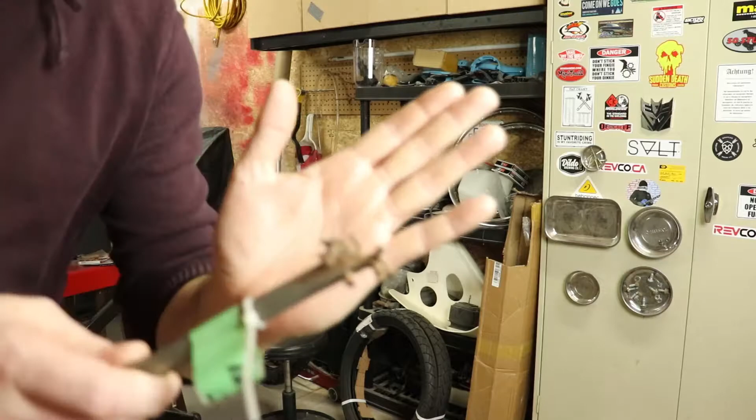Back in April of 2021, I started shooting part 9 of the C70 restoration series. You can see there's a bunch of C70 parts here, tires, rims and stuff like that. What we're doing in that video is the wheels. I got the wheels apart, but the spokes are in really bad shape. Let me bring you in - well, not horrible, but not something I want to put back on the bike. You can see they're rather rusty, so these need to be replated.

I recently ordered a bunch of nickel, actual pure nickel. I'm going to be making a nickel plating solution out of that and doing some electroplating, so you'll see that in that video. But while we wait for that stuff to show up, I have an idea with regard to something I'm going to want, potentially need, when we put these wheels back together. So to the bench, let me show you what I'm talking about.

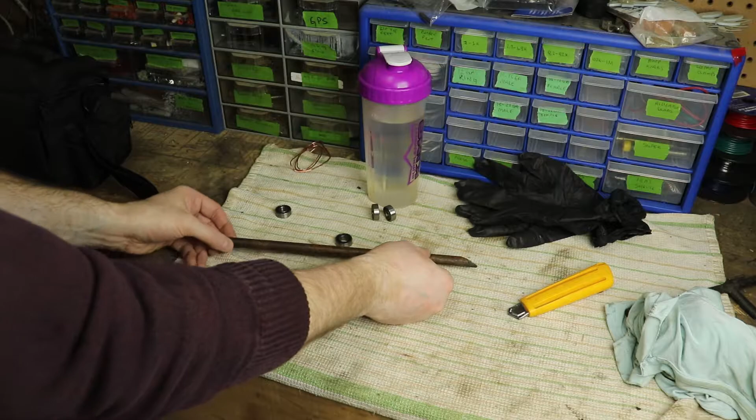I took a quick trip over to my scrap pile of steel and I've got this rod that I want to use. The way these are usually made is you have 2 uprights, and on top of each upright you have bearings mounted on either side. Your rod then sits on top of those bearings so it can spin freely. Then you have cones on either side with set screws that you can tighten down to hold your wheel in place. That all is mounted on a flat base.

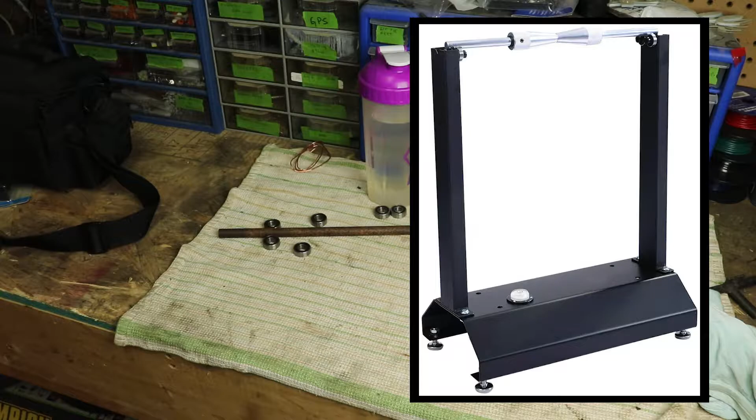I'm not too concerned with the flat base part. I'm not going to make something with adjustable feet or anything, because this is something I'll probably just clamp using vice grips or C-clamps onto the end of my motorcycle lift. That way I have an easy spot to adjust up and down to work on this stuff. So here's a quick look once again up close on something you can buy, and I'm going to try to build it. Here we go.

The first thing I need to do is cut this nasty pointy end off this piece of rod. I'll zing that off quick, and we'll bring this rod over to the lathe and ensure everything's good, true, and cleaned up.

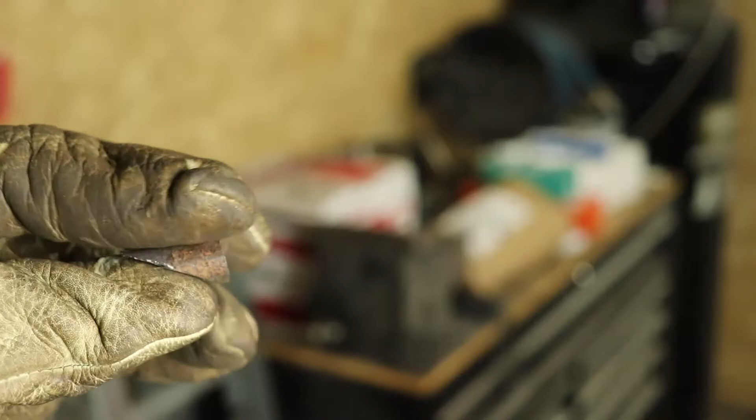Now that we've got the nasty pointy bit off the end, relatively decent cut - no Allen Millyard, but it works out. Let's take this over to the lathe, get it center drilled on both ends, so I can use a live center with it, and get it cleaned up.

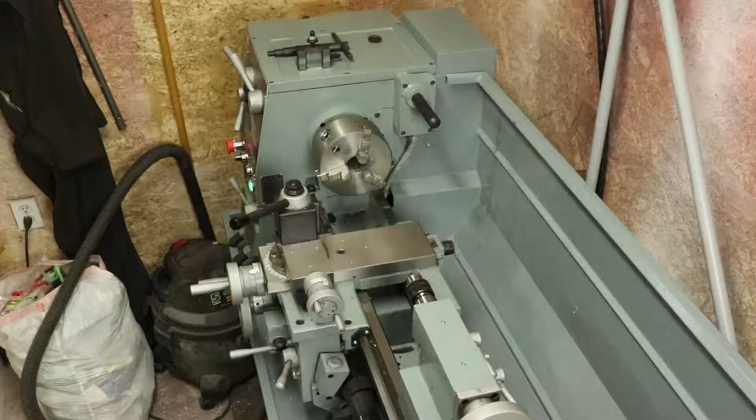So to this point I've got my piece of steel cleaned up - I just cleaned it up on a wire wheel. Hopefully this is looking alright, I'm going to double check this, make sure it's not bad. Yeah, you guys can see what I'm doing. You can't see my face, but who needs to?

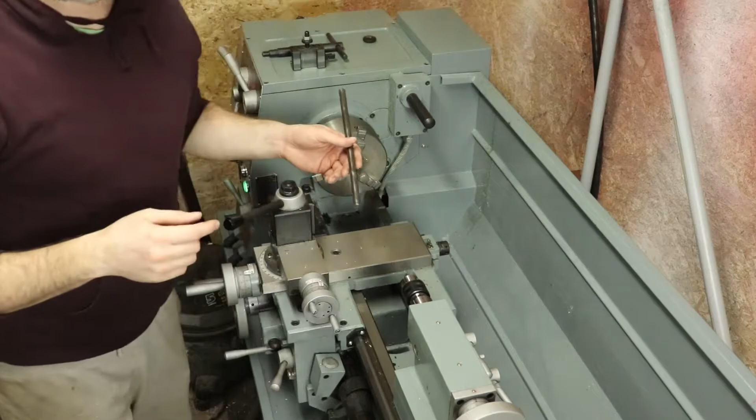What I'm going to do is put my 3-jaw back on and chuck this up. We'll center drill each end. First I'll face it off and center drill, then flip it around, face it off, and center drill again. Then I've got a means of putting that in a live center, keeping this nice and straight with hopefully minimal flex when I take this down to size. I'll leave the camera running - this will be a quick fast forward through so you guys can see what I'm doing.

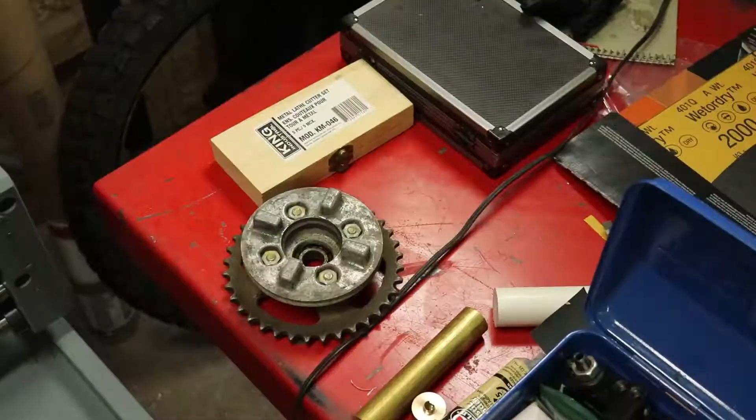So let's talk about the cones we want to make for this truing stand. Looking at the ID of the bearings in the hubs of the C70, I think these are 17 millimeter. Yep, there you go, focus that.

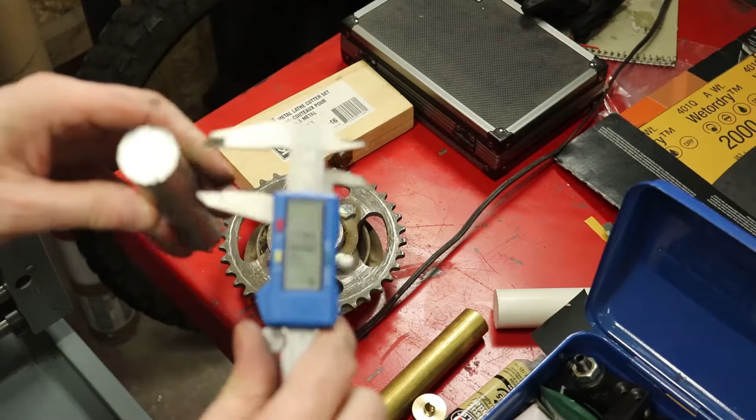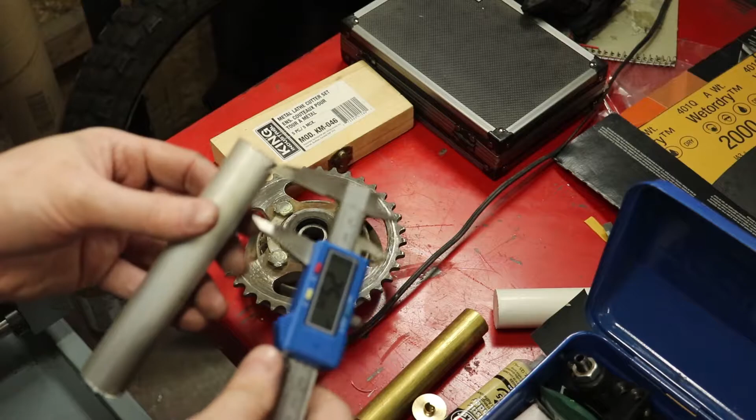The aluminum that I have is 1 inch, or 25 millimeter. Not autofocus, so you can see it, 25 millimeter. So I want to take a millimeter off the OD of this to make it 24. Let me turn autofocus back on here. So what I'll do is take a millimeter off, as you can see, this is 25. I'll take a mil and a bit off that to make it 24.

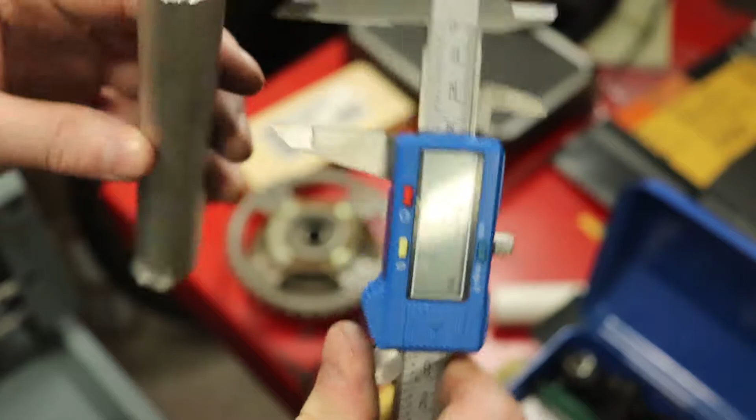I'll make these cones 50 millimeters long, roughly 2 inches. Wherever that 50 point was, I'll try to hold that with my thumb. We'll take this into 40 mil, leaving a centimeter up top for the flat piece, where we'll drill and have our set screw. The taper will be 40 mils long, going from the 24 down to probably something just a little larger than the diameter of the rod, which is 12 millimeter, so probably like 14 millimeter. So we'll take a centimeter off total for the taper on this.

So I'm going to get this chucked up, get an edge straight, bring it down to 24 millimeters, and then we'll go ahead and start cutting the taper and get our first cone made. See how it goes.

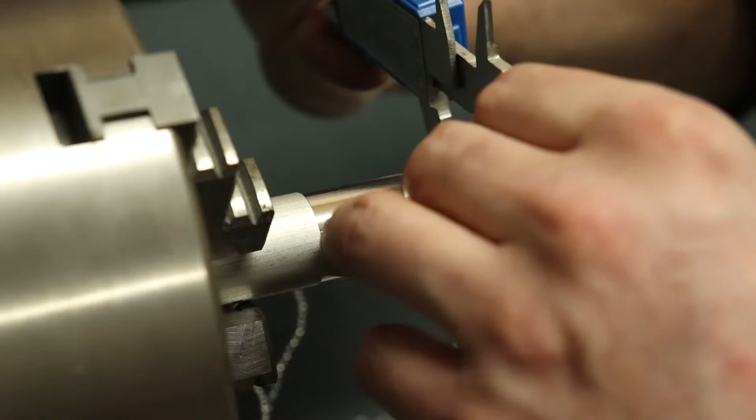At this point we should be pretty much dead on final diameter. Have a quick check here. We got 24.03, 24.04. So yeah, we're there. I'll call that good. So now what I want to do is set up my compound to do our taper.

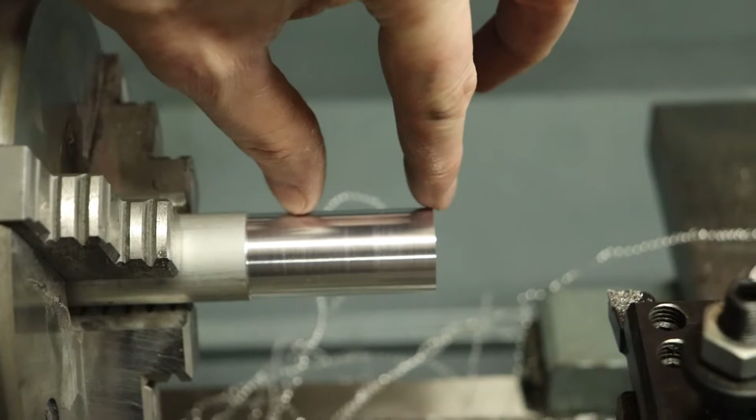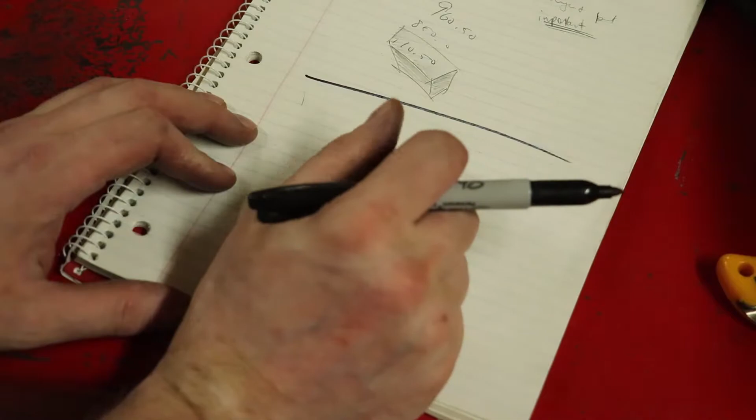If I just lift you, hopefully this is half steady. What we now want is, I'll mark off 40 millimeters, 4 centimeters of width, and we're going to go from a 14 millimeter end of the cone over here up to 24 here, so we'll have essentially a centimeter of ID to work with when we go to true up any wheels going forward on the stand. So we're going from 14 millimeter to 24 millimeter, meaning we have 1 full centimeter to take off, and because we'll be doing this as a triangle, we'll be doing half of it.

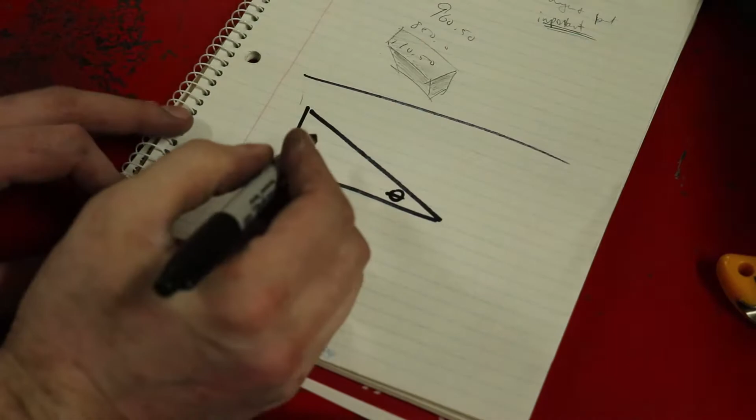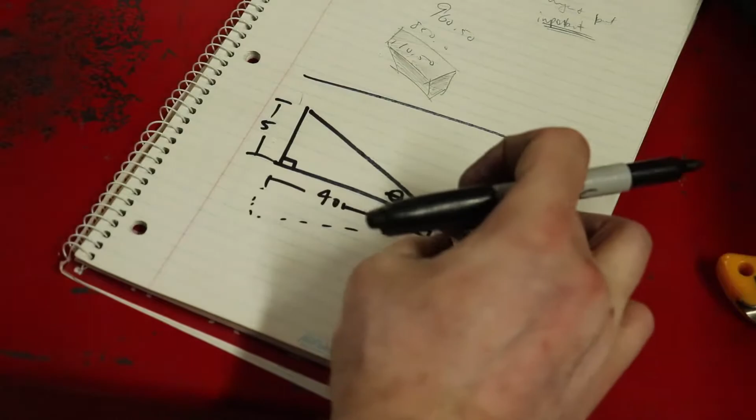So we've got a situation with a right triangle, angle theta. This side is 40 millimeters, and this side is going to be 5, because it's half of the 1 centimeter, or 10 for the whole thing. Just think if it backed up this way, we'd be going from that 14 out to the 24 - we just have a gap here, but we're not too concerned with that gap right now.

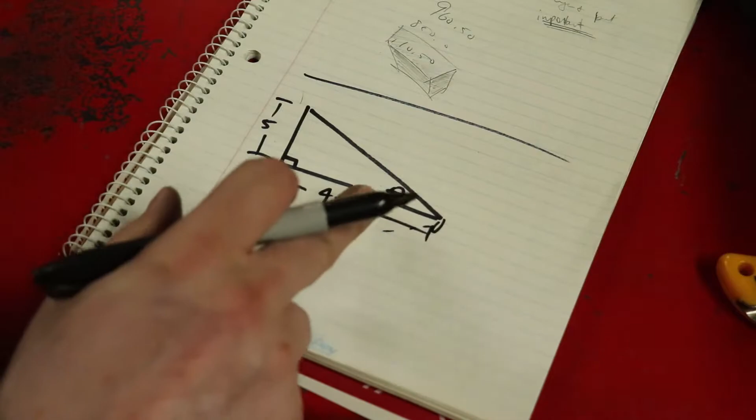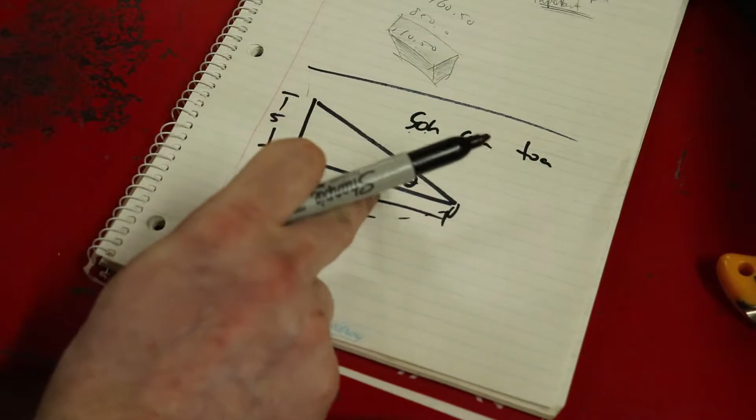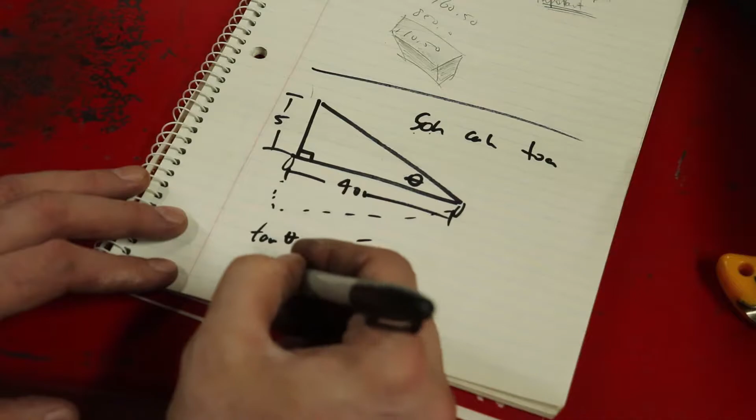So if we look at this, solving this is going to be sine of theta equals opposite over hypotenuse - sorry, opposite over adjacent, SOHCAHTOA. I've got to use tangent here. Sine is opposite over hypotenuse, cosine is adjacent over hypotenuse, and tan is opposite over adjacent. So tan theta equals opposite over adjacent, meaning theta is the inverse tangent of 1 over 8, which works out to be...

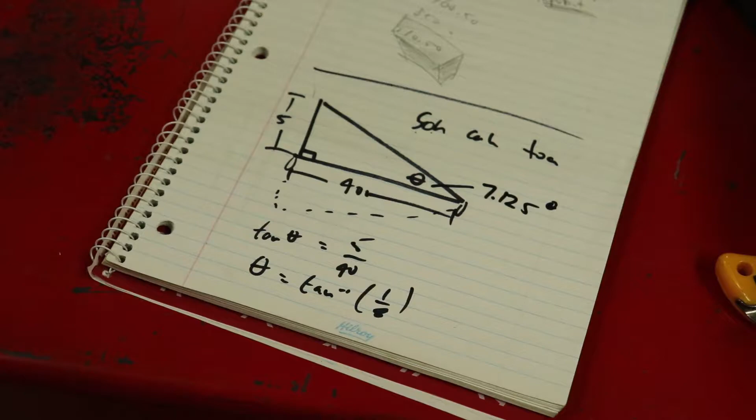Let me get this zoomed in here. Come on, focus. The inverse tangent of 1 over 8 is 0.12 something radians, or 7.125 degrees. So now we know this angle is 7.125 degrees. We're going to go with 7 degrees, because there's no way you're getting an eighth of a degree of accuracy out of the compound on this lathe. So I went ahead and set my compound at 7 degrees.

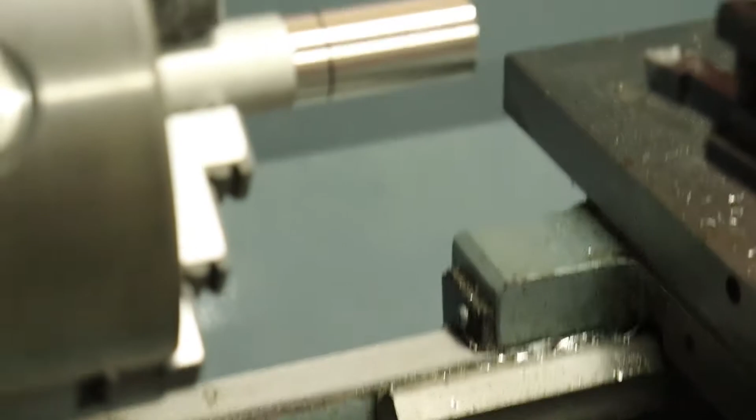Bring you guys over closer. Let's see - 7 degrees. So now I'm ready to go ahead and take my taper cuts on the component. I'm going to keep you guys around for the first couple passes, you'll see as I start taking more and more off, and then I'll bring you guys back once I'm complete.

I think you guys get the idea by this point. I've got another little tiny bit to take off, and once I'm done getting that off, it'll be time to actually part this off using my parting tool. So I'll be putting this in, parting it off, then I'll be ready to put this in the vise, drill a hole, tap it for a set screw, and we'll be good to test it out on the shaft. Then I have to make another one. Either way, I'll bring you guys back when I get this parted off and I'm ready to drill a hole in it.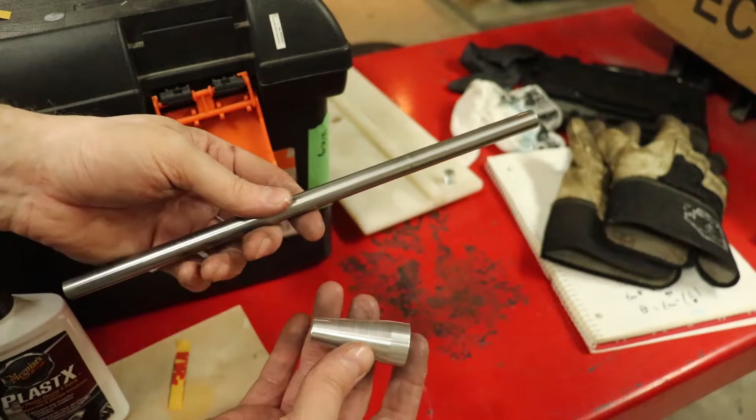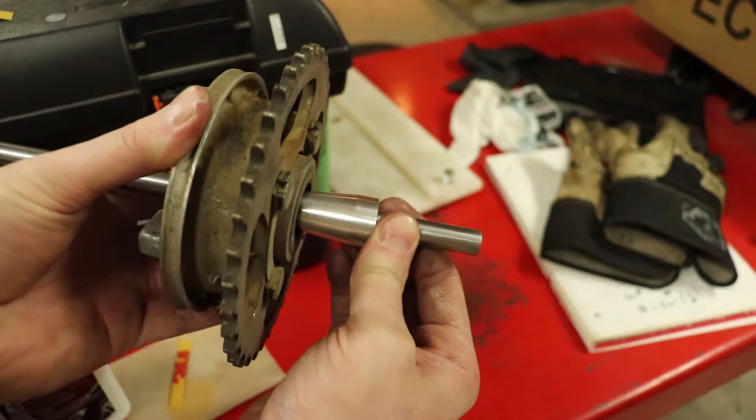So here's the situation now. We've got the rod we did earlier, and we've now got a cone. Essentially, the cone slides onto the rod, then the motorcycle wheel goes on, the cone goes into the bearings like so, and now this whole thing rotates because it will be set on bearings right here. So we've got a way to mount the wheel on a truing stand slash balancing stand.

So I'm going to go ahead and machine up the other one of these, this cone. Once we have our second cone done, I'll be ready to drill and tap the holes for the set screws that'll lock the cones onto the rods. So I'll be back once I have a second one of these. See you guys in 15 minutes or so.

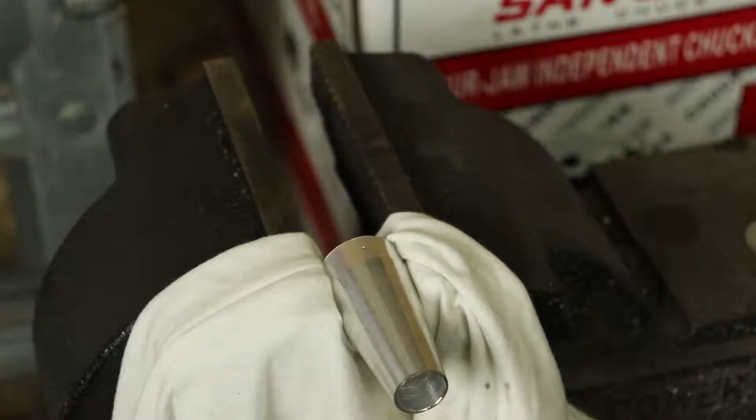For you guys, a few seconds. So I've got one of my cones cinched up in the vise here, my drill ready, so I got my spot here. This is a 13/64 drill bit.

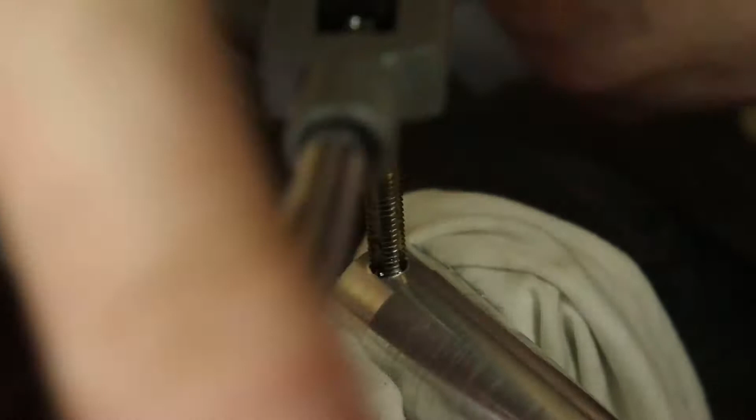And now we should be able to take our metric 6x1 set screw and thread it down into this hole. Here we go. And now this will act as the means of keeping the cone and the shaft together as one. So I'm going to go ahead and do the other one, and I'll bring you guys back when we got this on the shaft.

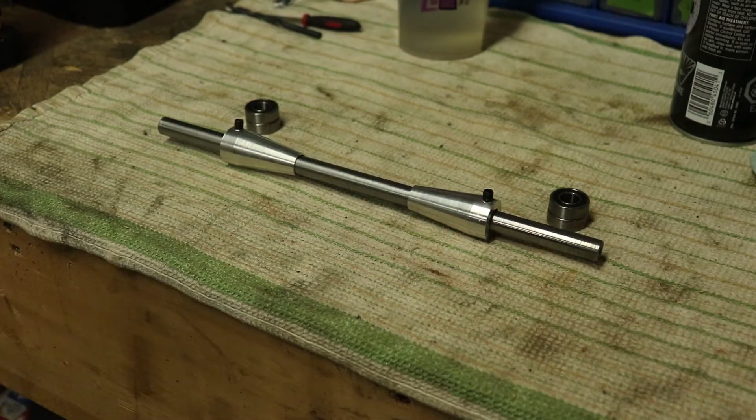So here's the current situation. Axle's done, cones are done, also with the set screw holes tapped and drilled. So what happens is, slide the cone on one side, set your set screw on the other side. Wheel gets put on, so this goes through where the axle usually goes in the wheel.

This goes up against the inner diameter of the wheel bearing on one side. You bring in your other cone, same thing, that goes then in against the other side. You tighten this set screw. Now your wheel, your cones, and your axle are all one assembly.

So then when this is laid on top of the frame that we're going to be building, these bearings will then sit under either side of the axle, like so. And then when you spin your wheel, it'll spin freely and you'll be able to balance or true up the spokes or true up the rim by adjusting your spokes, etc.

So at this point, I think I still may have one small piece of machining work to do, and that will be to create, I guess, the nuts or the screws or however I want to fix these to the top part of the frame.

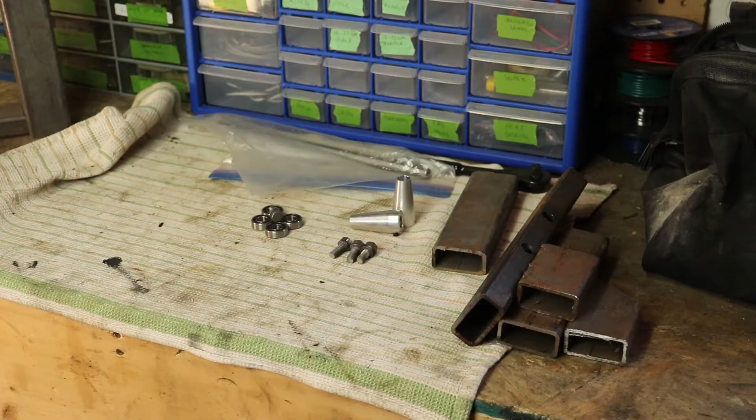My original intent here was to build my uprights or my frame out of 1x2 steel. And I only had a few scrap pieces, so what I was going to do was weld those together and make something big enough to do that, but I don't have enough of it.

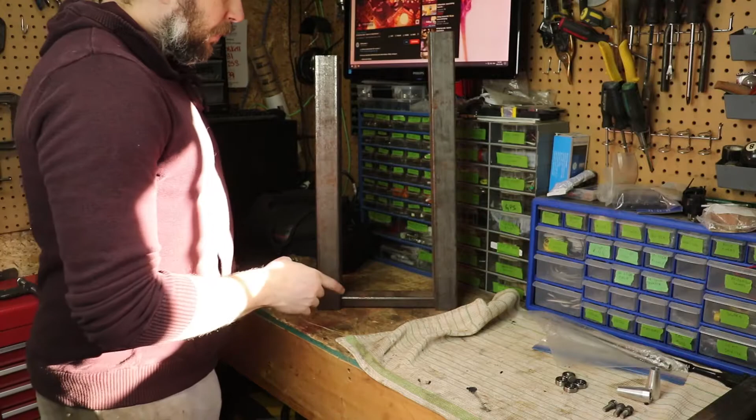So what I did find is a couple pieces of 2 inch by 3 inch, 1/8 inch wall steel. This is totally overkill, but it'll still work. These pieces get cut off at 20 inches tall, so I want a 20 inch height frame. We'll then tap and drill so we can bolt our bearings on so that they just stick just over the surface of it, kind of like so.

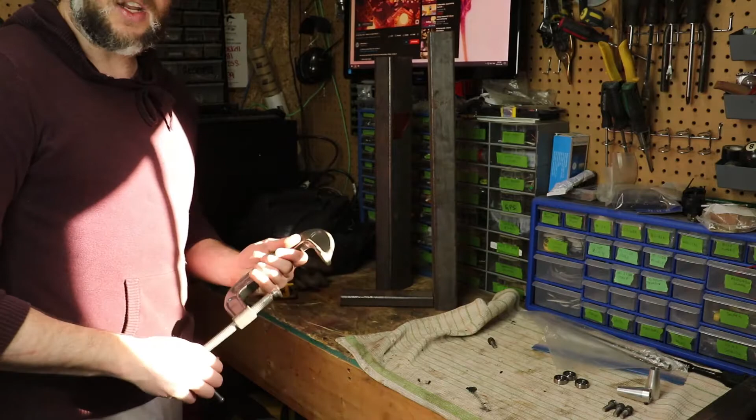That way our rod can rest between those two bearings and rotate freely. And we'll use a small piece of the 1x2 as the cross member, and this will all get welded up. Once that's done, this essentially just gets C-clamped onto the end of my motorcycle lift, and we can use it right off the end of the lift as a truing stand. So, first thing we got to do is cut these two pieces off.

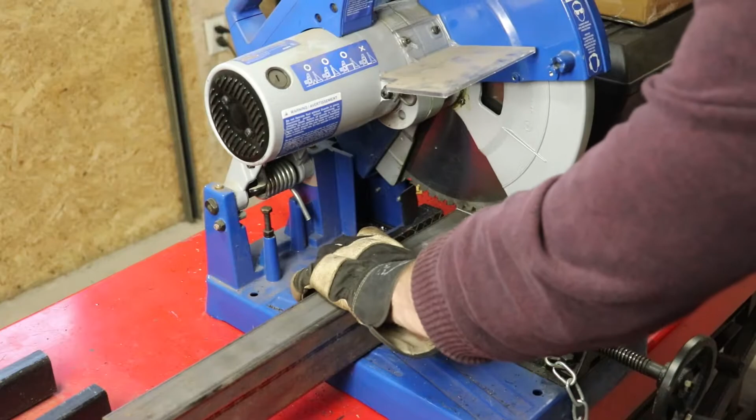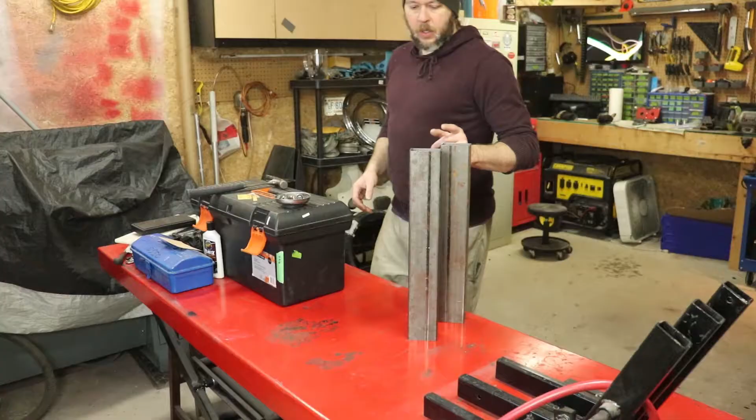Now that we've got these legs cut to length, what we need to do next is drill and tap the holes where we're going to attach our bearings to. Now, one thing to note is, and I'll come in close for a sec just to show you this. Autofocus on.

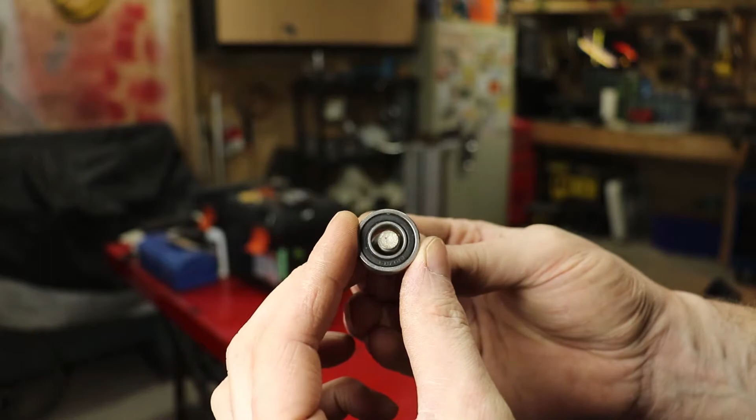Because this would be sloppy inside the inner diameter of this bearing, I'm going to make some brass bushings to fit inside these. That'll fit tight on the ID of these and fit tight on the OD of these bolts. So I'm going to see if I can do this in a minute.

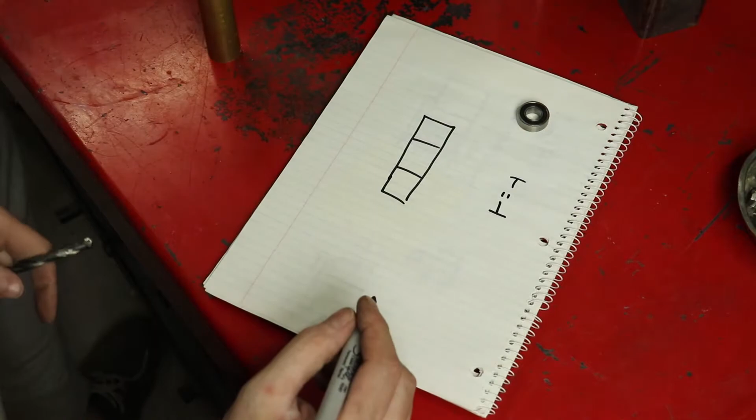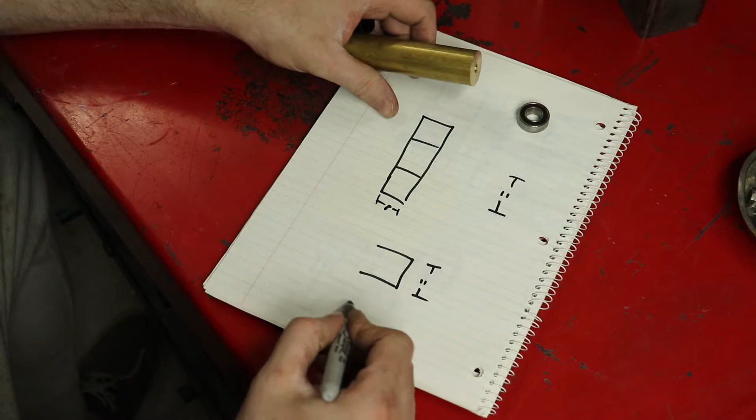We've got a bearing, looks like this. We got a bearing ID like this. These bearings have an ID of 11 millimeters. So that means we're going to want this bushing, when it's machined down, to fit 11 millimeters. So we've got this part of the bushing that goes through the bearing, which is 11 millimeters. We've got a width here of 8 millimeters, so this width here we're going to want to be 8 millimeters.

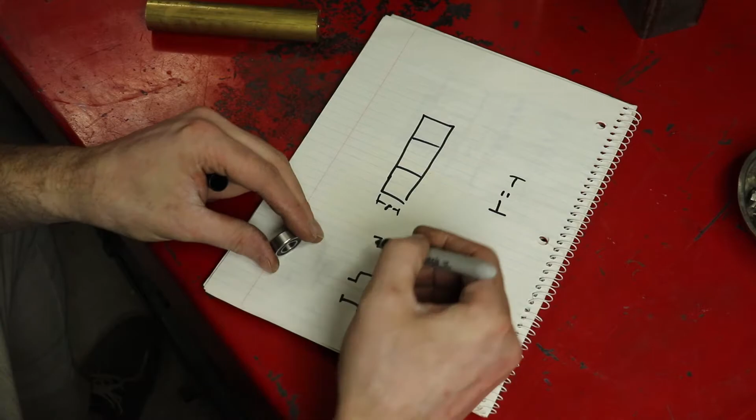Then I'm going to make a flange. It's going to be essentially like a washer to keep this off of the steel so it can spin freely, 1 millimeter wide. Give us 1 millimeter wide there. So this here is 1 millimeter. And then this here will be, from here to here, 13.5 millimeters.

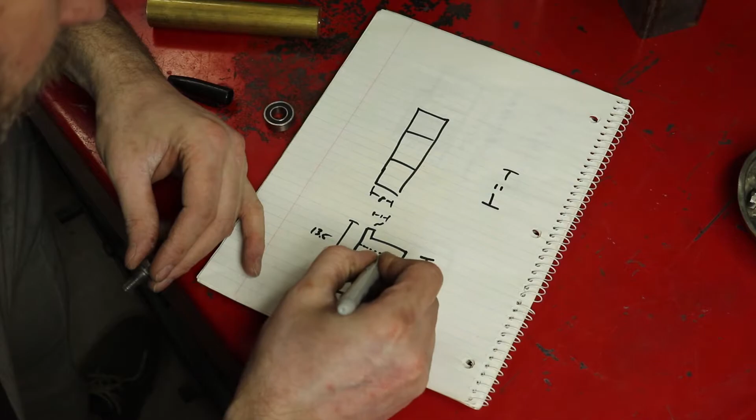I just measured that. And finally, we want a hole for the bolt to go through so we can screw that on. These bolts are 7.8 millimeters. So here's that hole there. This here is 7.8, and that's essentially 5/16. I went ahead and checked that with my calipers. So this is the part we're going to make right now.

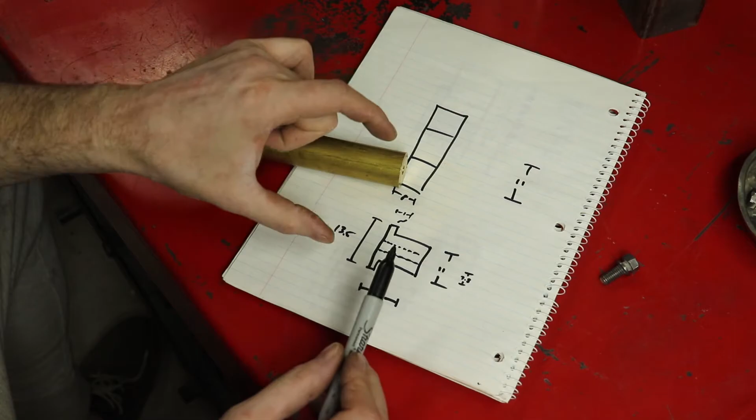So the order of operations to make this part is: take this round stock, machine it down to a total OD of 13.5 for a few centimeters, then drill a hole through it, that's 5/16, which gives clearance for our bolt. Then we'll come in 8 millimeters, down at 11, and leave the outside one. Then we can part it off, and we'll have a bushing we can test. So, to make this more clear for my brain and your brain, let's go to the lathe and start machining.

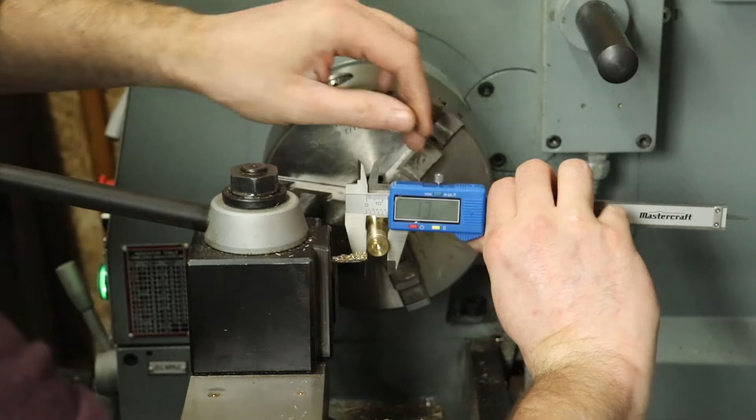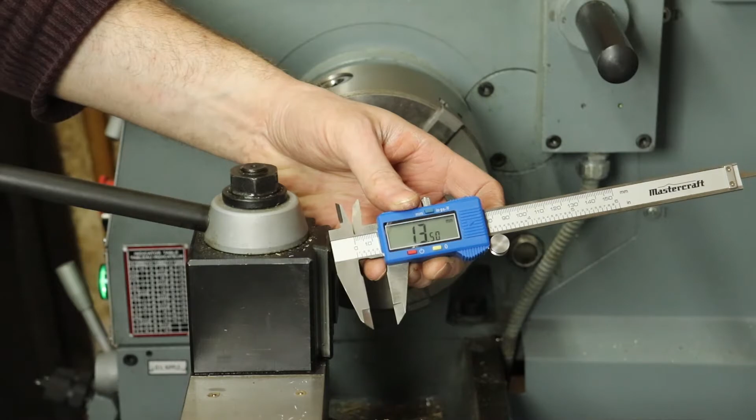So we're right on our 13.5 there. Maybe you can see that without the light. There you go, 13.5 - that matches the size of the band for the inner bearing race.

So now I'm going to drill this out with the 5/16 drill bit, which should be about 7.8 millimeters, and then we'll have a spot for our bolts to go through.

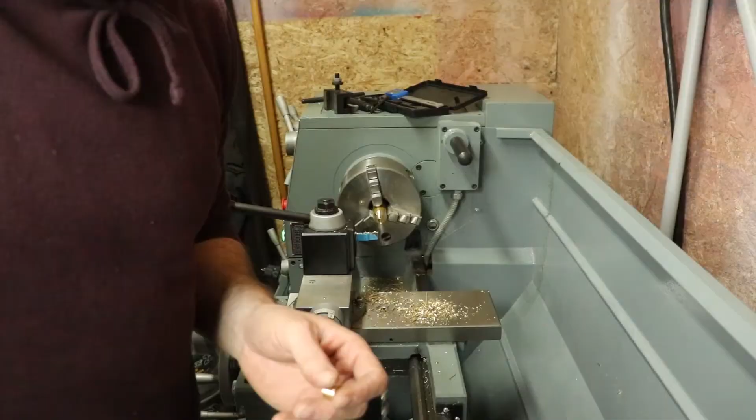So now we've got this situation - I've got one bushing made. Let's see if I can hold that up for you so you can focus there. There you go, so there's the little bushing - see the flange stuff on it.

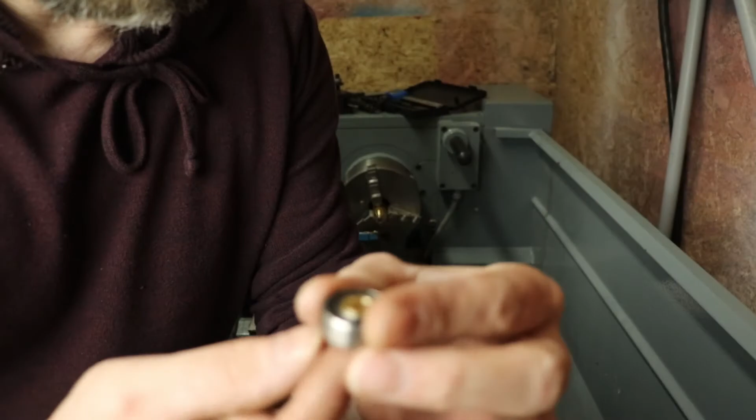So if we take our bearing, see that the bushing goes into the bearing like so - there's a nice snug fit in there. Our bolt would then go through this side, holding against the inside race. Now you see it's not super tight because I don't have the exact drill bit size, but that'll be more than good enough once you put that in to have a nice bearing setup.

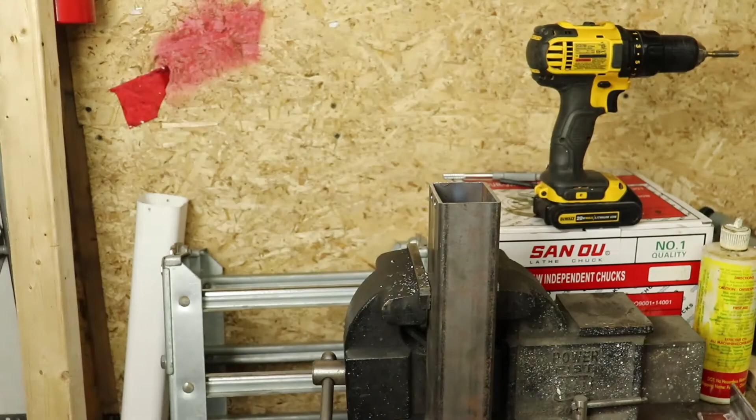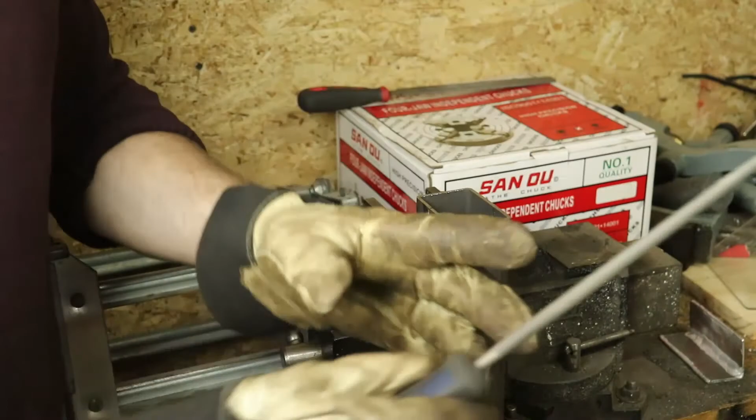So in looking at the shaft and where it was rotating on the bearings, there's like probably 0.5 millimeter of clearance between the shaft and the top of the leg. So what I'm doing now is - I already did one, just going to do the other. I'm using a round file to first come down the middle of that spot to get started, go down so far, and then I'm going to flatten off the ridges with the flat file.

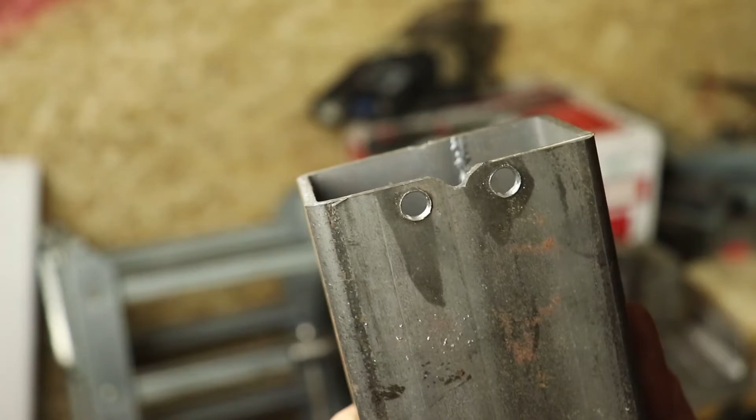So this is the device, you can see I've got my little dip made there, and it gives us a bit more clearance for that rod when it's rotating. So now, time to cut a couple more pieces of this 2x3 so we can get this all welded up.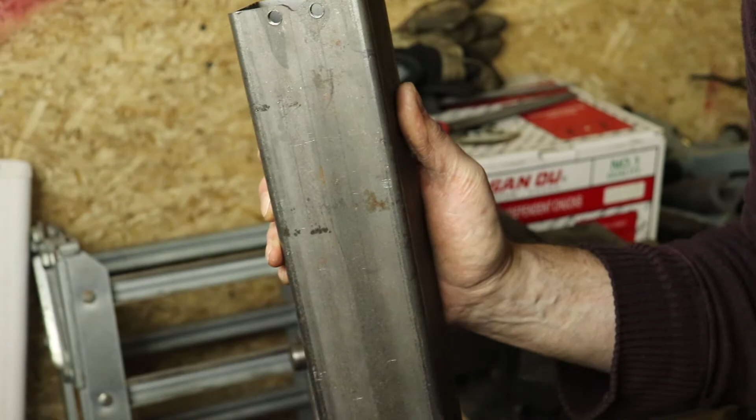So the original idea here was to have a piece fixed within the bottom of the legs that would set the width of this truing/balancing stand, which would then be clamped onto the end of the bench. A couple issues I see with that: one, fixed width, no longer can adjust, open, close, whatever - not entirely horrible, but it would be nice to have that option. The second issue is there's going to be another 2-inch piece of 2x3 steel here, and that takes up added room, so if I get a taller wheel, it might bump up on it.

So the brainwave I had was to set it up such that I can cut 4 3-inch pieces of angle iron - I've got the angle iron here. Essentially the angle iron gets welded onto the bottom of each leg like so - one piece here, one piece here, one piece here, one piece here. Then we can clamp our legs independently to the table, so we can have a fixed width, or fix it to any width we want within the width of that axle, and we can also have that extra clearance down here. So that's what we're going to do - I'm going to take this over to the saw, cut off 4 pieces, get it all welded up, then clamp it on the bench and have a look at it.